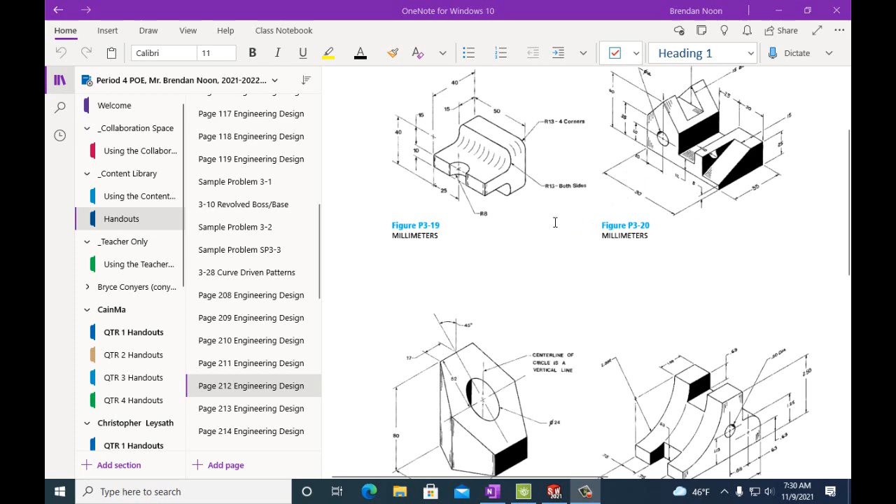So I'm gonna do 319, 320, and 321, so you can see how to do those, and then you could do 322 on your own. I'm pretty sure you can complete this one on your own already. Pretty sure you can complete this one too, but it has a lot of steps here, and there's a lot of different ways you can do this. But I'm going to show you how I'm going to do it. And then you could follow along, or you can follow your own methods, or try it on your own first.

So let's go ahead. We'll do 319, and what do we have? We have millimeters. This is 10. This is 15. 15 across, and we have 50. And let's see, what is the height over here? Let's look at this. This is 40. So we have a total height of 40. So we have 15 by 50 by 40 for this, and then I'm going to draw on this face.

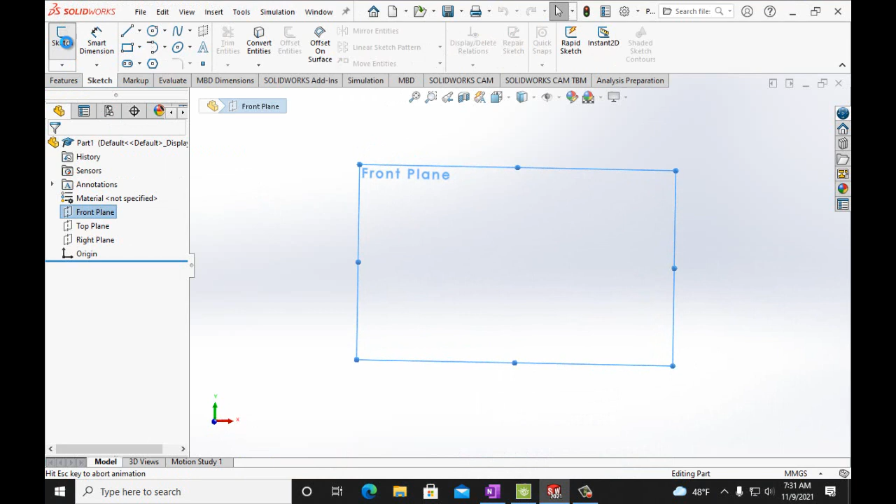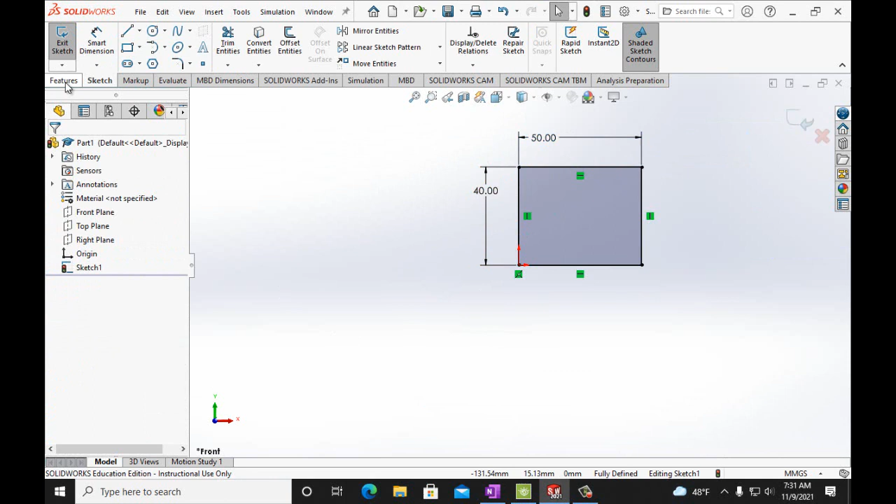So I'm going to start on the front plane. I'm going to draw a rectangle, and then I'm going to draw another rectangle and extrude that out. All right, so we want 40 by 50. Front plane, sketch, rectangle. Smart dimension it. 40 millimeters by 50 millimeters. And we're going to extrude that out 15 millimeters. Check mark. All right, so we have this shape.

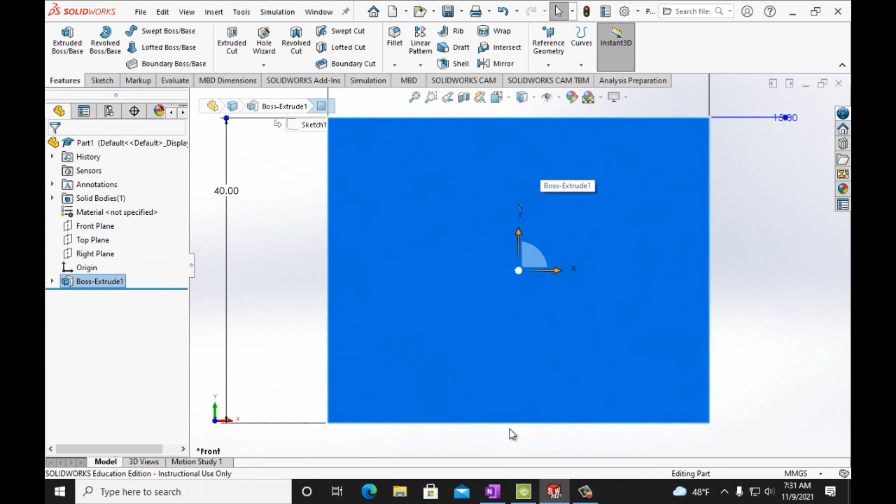So let's look at this face right here. Let's go to front, and what I want to do now is I want to draw this. This is 10, and let's see, that's 40. 15 plus 15, so it's centered 15 above and 15 below, but really all we need is a distance of 15. So this is 10, and then it's a distance 15 from the top.

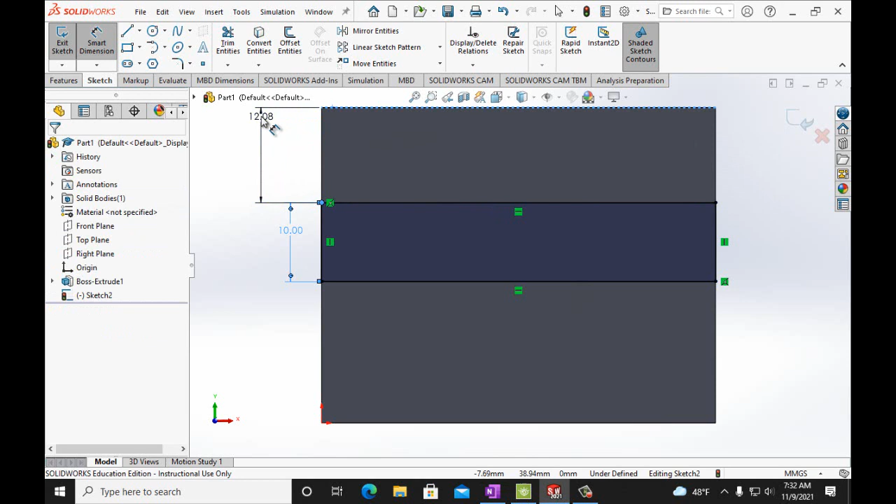So we go ahead and get our sketch, rectangle tool, draw a rectangle, smart dimension, we want this to be 10 millimeters. And we want the distance from here to here to be 15 millimeters. All right, so that's centered. And then let's go back, and this is 40. So 40 minus 15 is 25. So we're going to extrude this out 25.

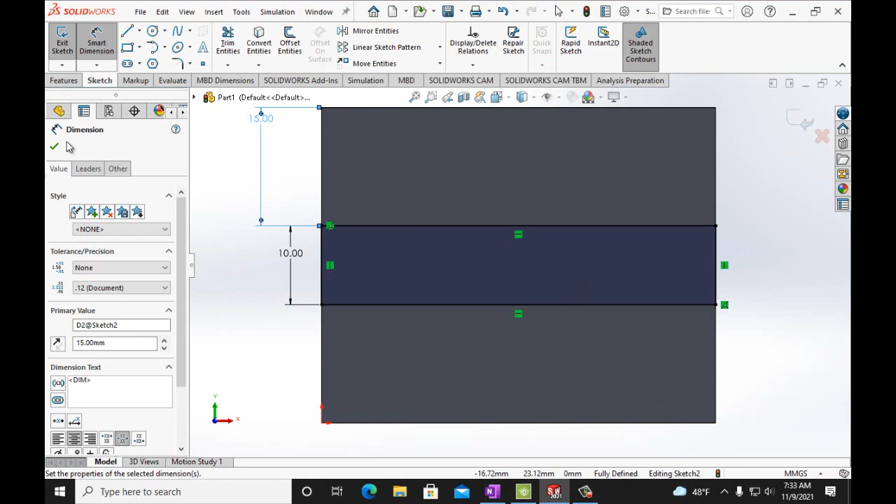Features, extrude boss base. Let's look at the angle here. Want this to be 25 millimeters. All right, so here we go. So we have this shape. Now what we want is a radius of 13, a fillet on both sides here, and radius of 13 all the way around. So we're going to fillet all these corners.

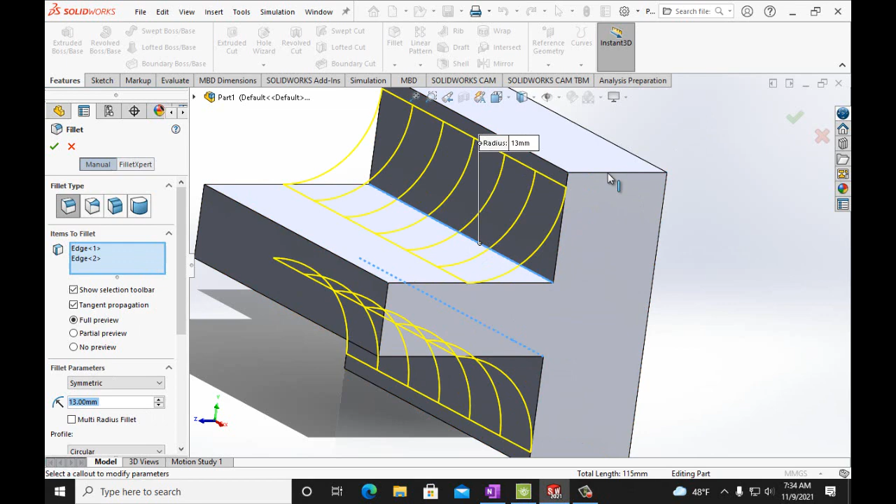All right, so we have our fillet tool. We want it to be 13 millimeters. We want a full preview. We're going to click here. We're going to click on that line down there. We're going to click here. Oh, let's do this first. Let's see. All right, oh, radius of 13. Yeah, radius of 13, 4 corners.

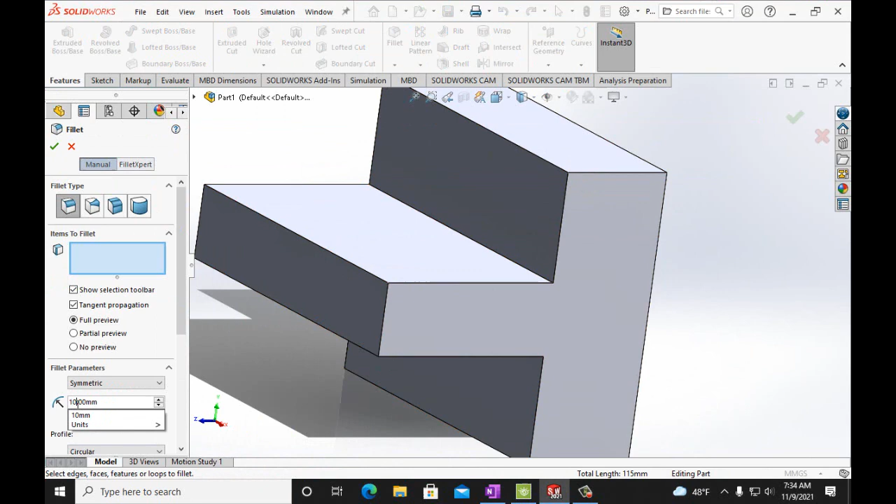All right, fillet tool. Radius of 13 millimeters. Full preview. 1. All right. Zoom out. Over there. Over there. Over there.

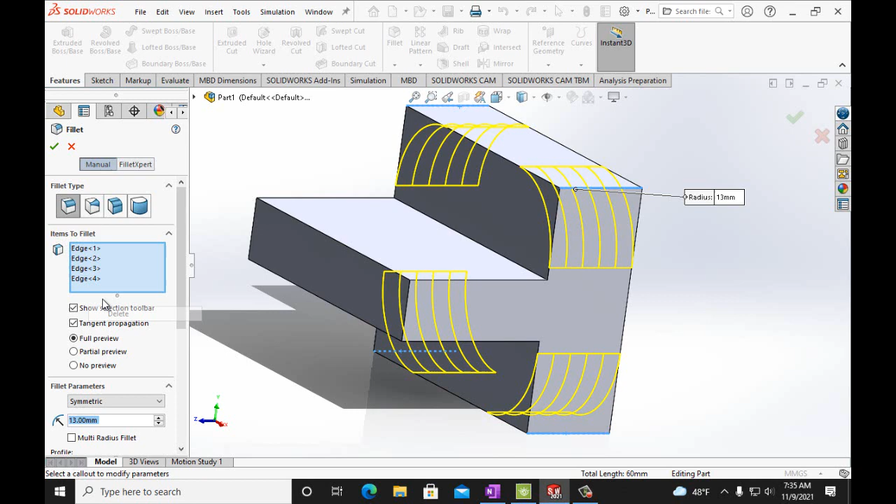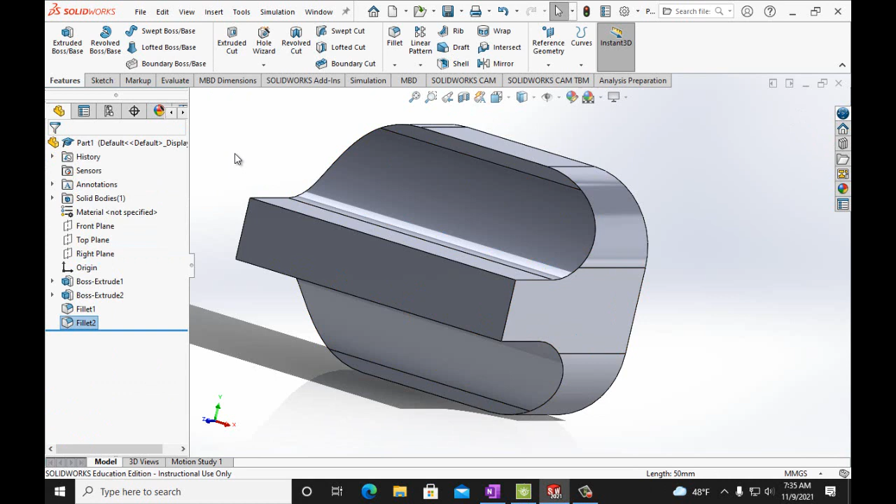All right, good, okay. All right, so we have this shape. And now we want to do radius here. Fillet. Here. And here. All right. So there we have this.

So the last thing we have to do is, on this face, let's see what we got here. We have a radius of 8, 25. So right in the center here, we have a radius of 8. So what I'm going to do is I'm going to do a circle, and I'm just going to do a cut through all. All right.

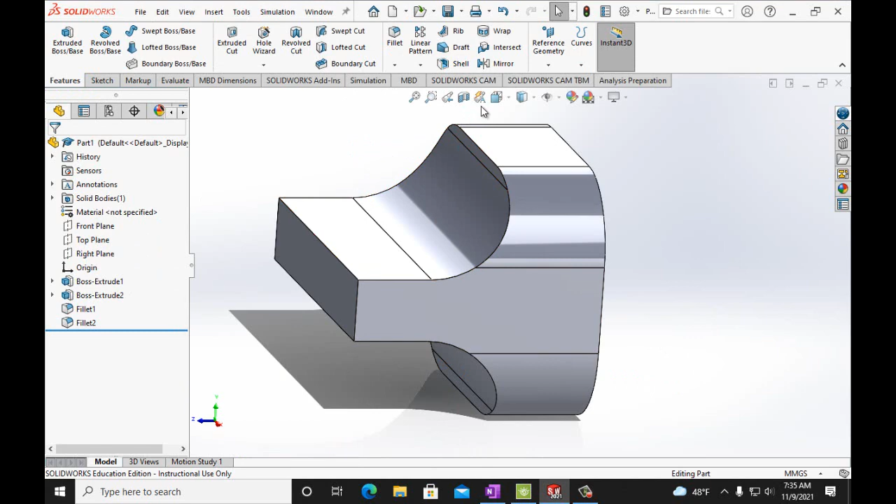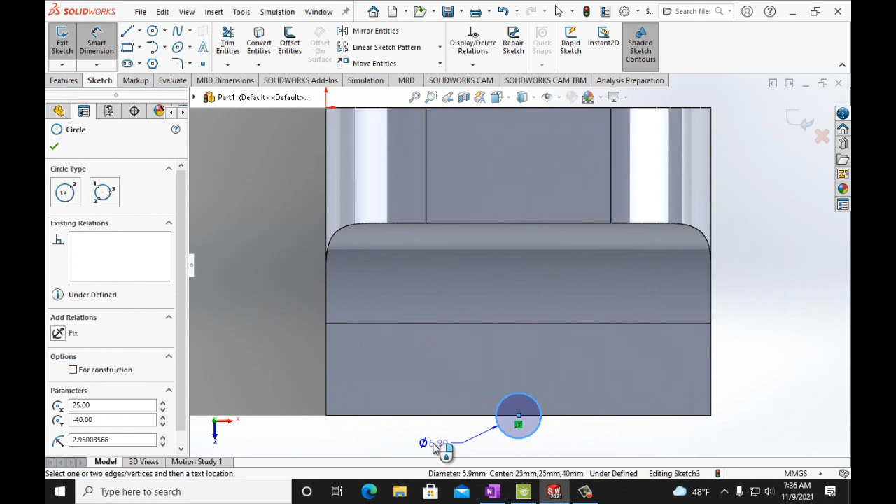So let's go ahead, come back here. I want to look at the top plane, I think. That's not top plane. Top plane. I'm going to click here. I'm going to sketch, circle, and then I want to come here and I want to find the middle part right there. I'm going to draw my circle. Smart dimension. And we have a diameter of 8 millimeters.

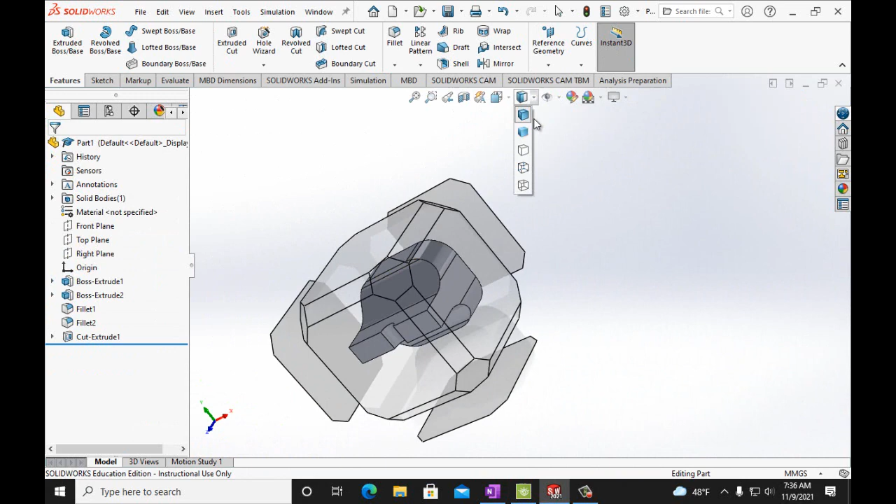And then I'm going to do features, extrude cut, through all, check mark. All right, so this is, oh, this is a radius of 8. I'm sorry, I did a diameter of 8. All right, let's go back. Edit, undo. Click on this. I want a diameter of 16 millimeters.

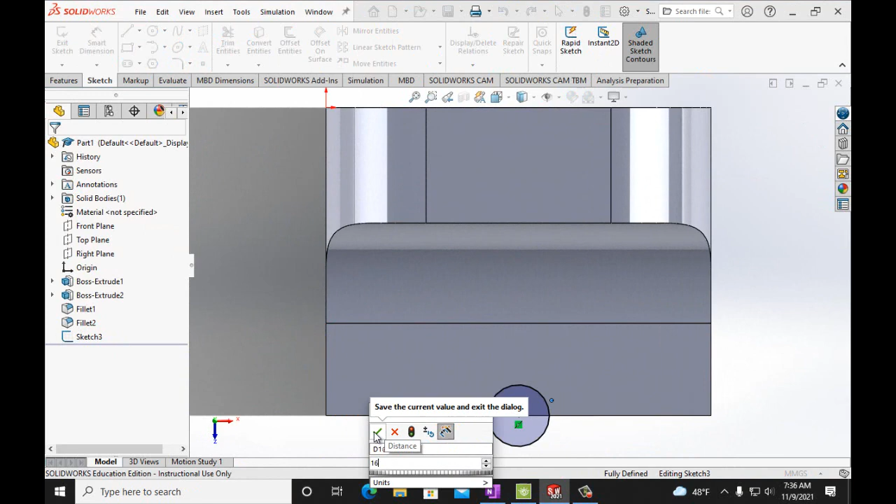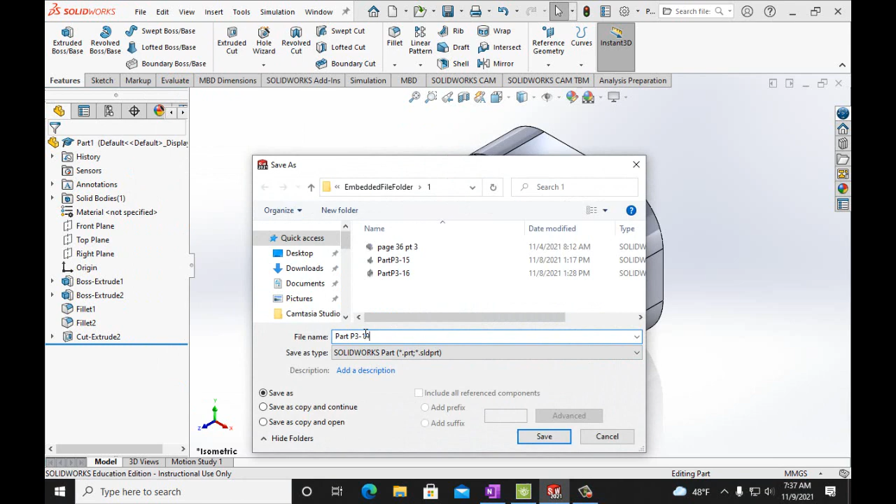Now I'm going to do the same thing. Feature, extrude cut, through all. All right, and I'm going to come over here. I want to do an isometric view. All right, so there you go. So this is P3-19. Of course, you need to file, save as, part P3-19, save, file, make drawing from part, okay.

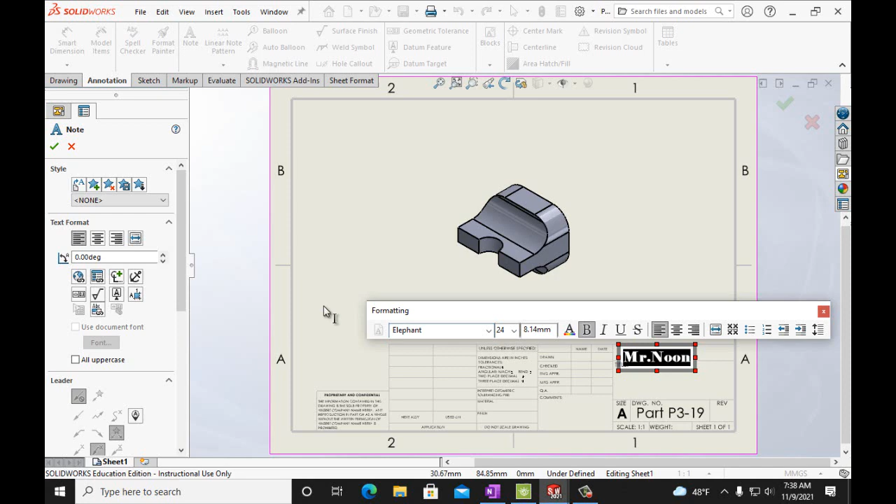All right, by now you should know all the different ways you can make drawings. We're going to put a note here, our name. We can increase the font, change the font, all that stuff. Make it bold. Okay, file, save. Yes. File, print. OneNote for Windows 10. Okay.

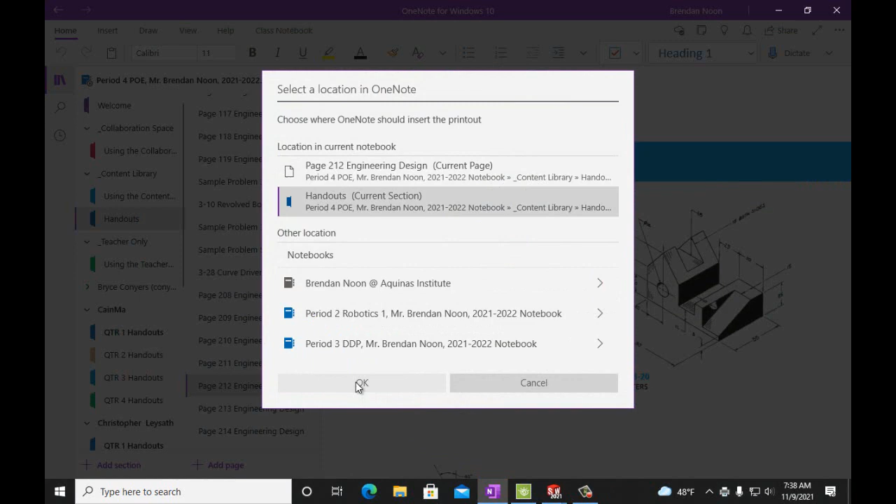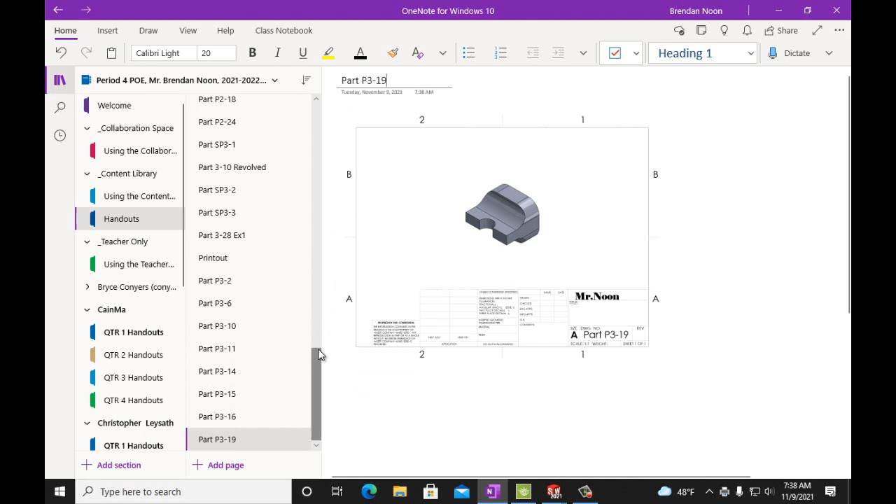And then pick where we want to put it. Set OK. We have the part P3-19. Okay, so that's all set. So we go back to our drawings.

Now, I'm going to do this one first because this one's easier, P3-21, and then we'll do this one, which is a little more difficult. All right. So let's get rid of that. Save all. And then we're going to do File, New, Part, OK. We're going to start on the top plane, sketch, and we want a Polygon Tool.

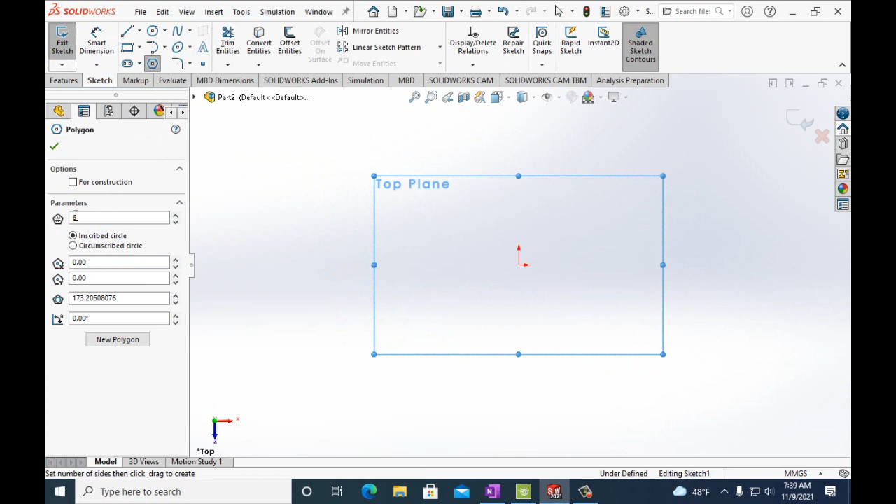All right, hexagon, 6 sides. You start in the middle, you drag yourself out. You can make the shape any way you want. Put it like this. Now we really don't have to do much, but I'm going to add a relation right here. I don't care about any of these. I just want this one to be horizontal. So it's perfectly horizontal. Everything else will be right into shape.

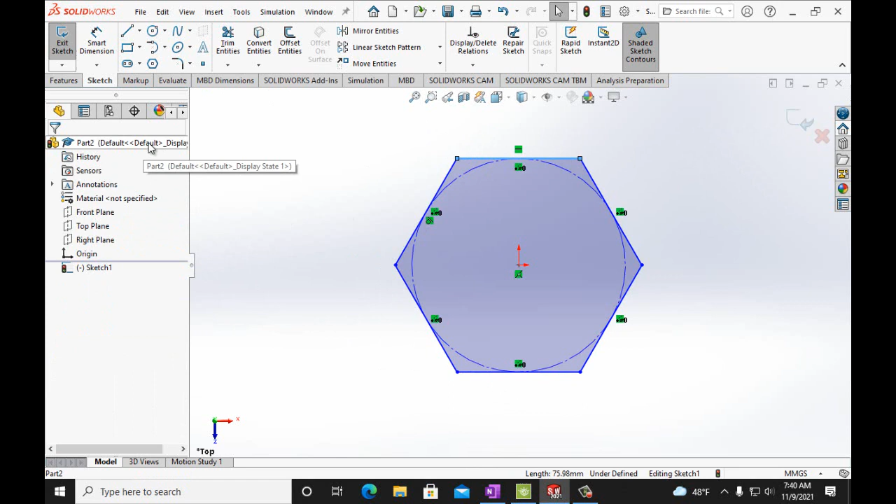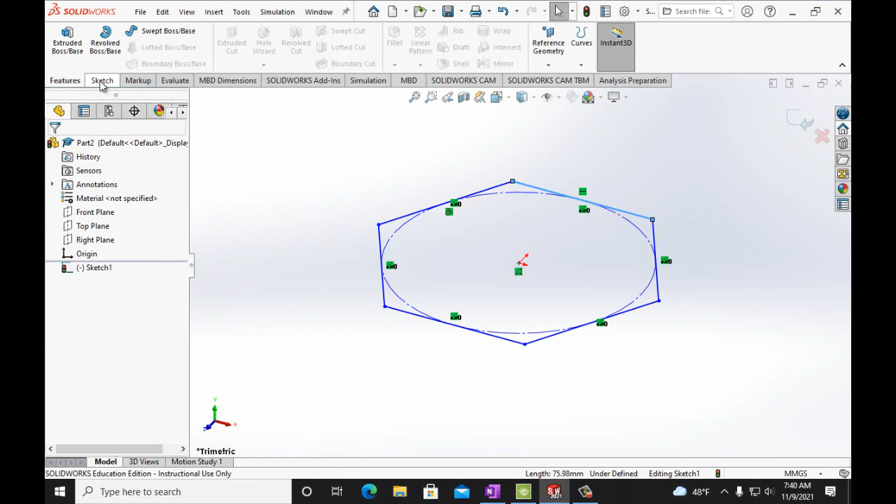All right, so features, extrude boss base. Let's see, how large do we want this guy? 80 millimeters. Oh, and the sides are 17 millimeters. I didn't do that yet. So let's go back here. All right, forgot to do that. Sketch. One side equals 17 millimeters. And then extrude boss base, 80 millimeters.

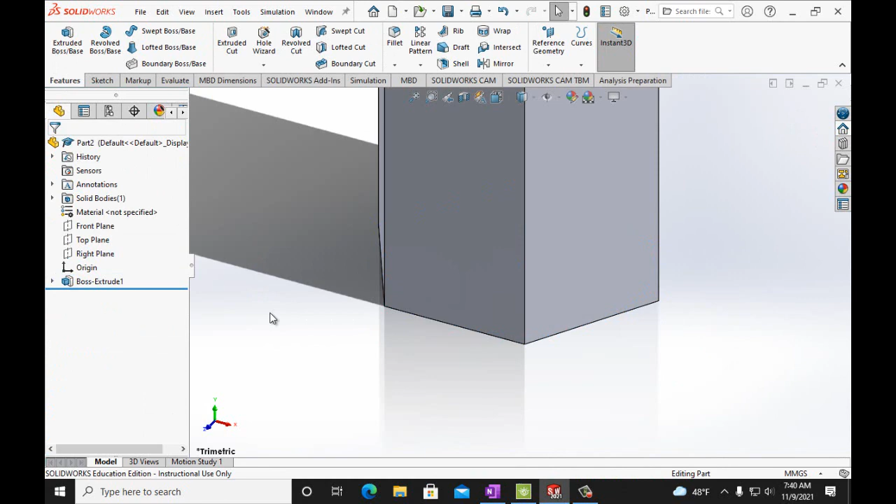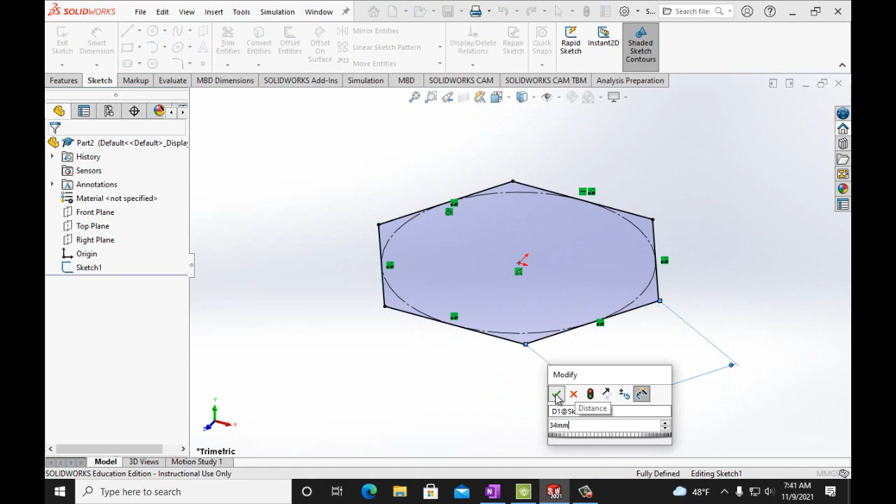All right, so we got this guy. Is that right? 80? Oh, wait, no. It's double 17. Oh, why did they do this? All right, so 17 plus 17 is 34. Okay, now I got to go back and do this over. Edit, undo. All right, so this would be 34 millimeters. And then features, extrude boss base, 80 is still there. All right, that looks more reasonable.

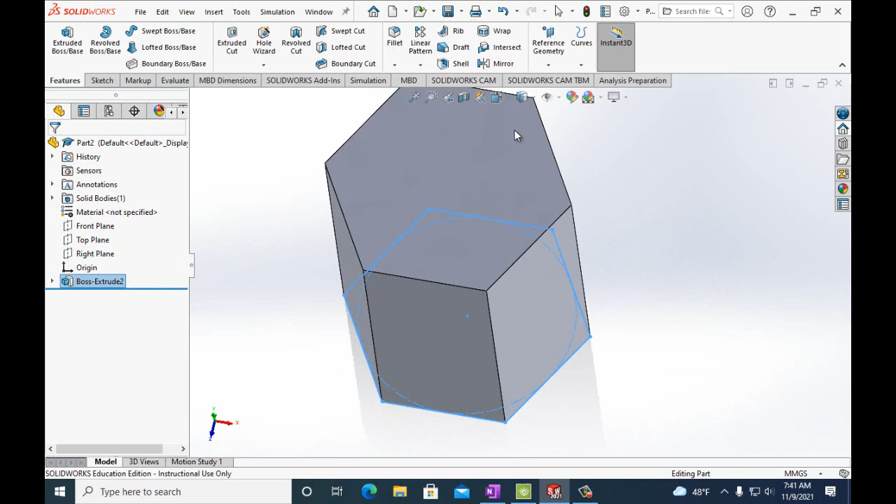All right, so we want to do top plane. So let's look at the top. Click on this face, sketch, circle. All right, and we want our circle to be a diameter of 24 millimeters.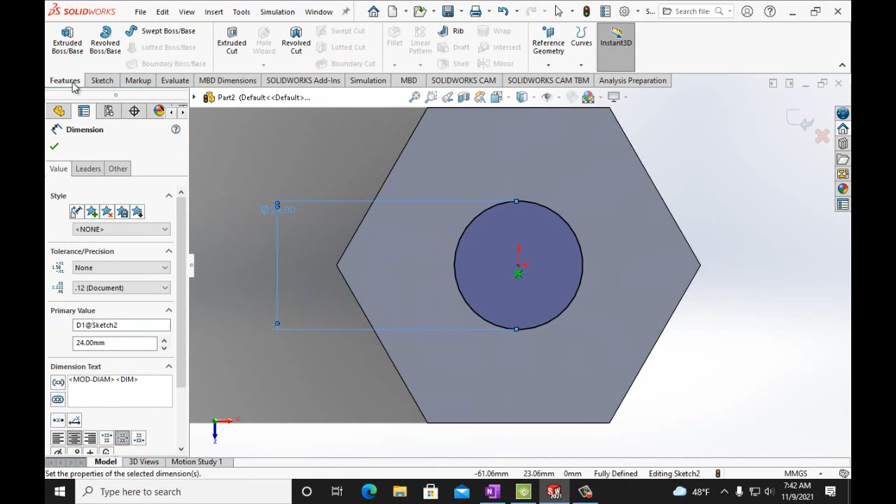And then we're going to extrude cut through all. All right, so we have that in there. Alrighty, so let's see, how do we do this? This slice is at an angle, so let's look at our sides.

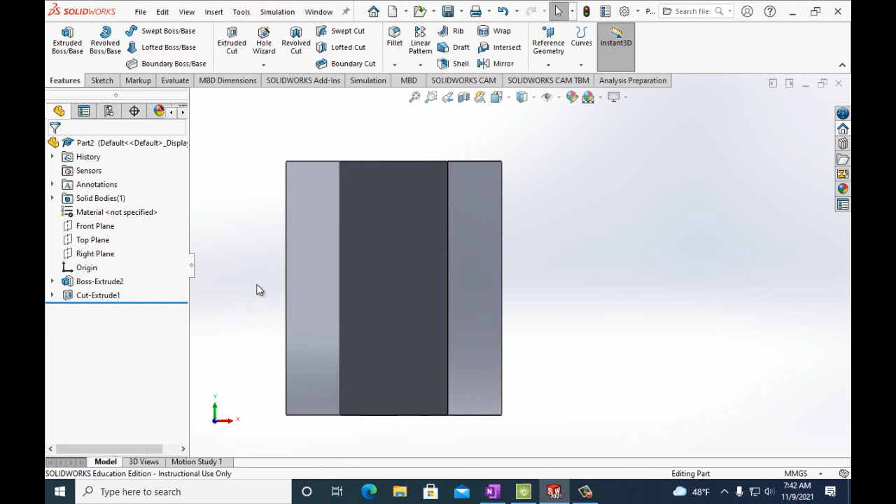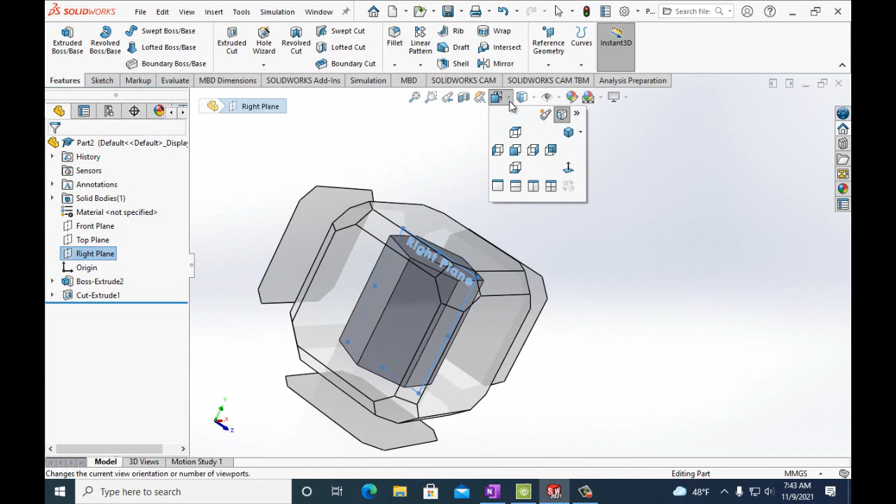Right plane, front plane, right plane. Okay, right plane. So then we go on the right plane here so we can look at it correctly. All right, this is good. All right, so we're on a right plane and we're going to do sketch.

And this is really simple. We want this to be, we got here, 45-degree angle, and it just goes across from the top over to here at a 45-degree angle. That's it. So let's come over here. I'll get our line tool, take this point, and come here, and then go up to here, and then over to here.

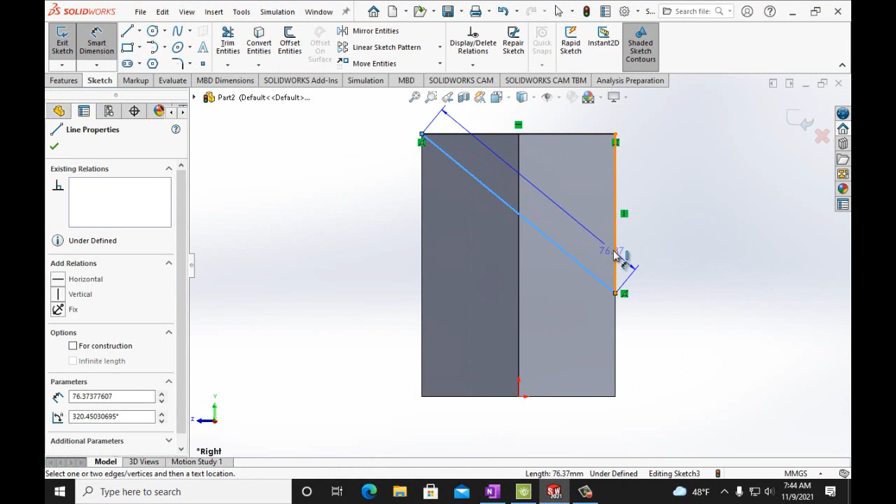And I want to see if I get this right with the angle. I don't like it when they turn it sideways like this. I wish I could rotate this to look at this angle. It messes with my head, spatial dimensional. All right, so 45 degrees between here and there is the same as smart dimension from here to there being 45 degrees.

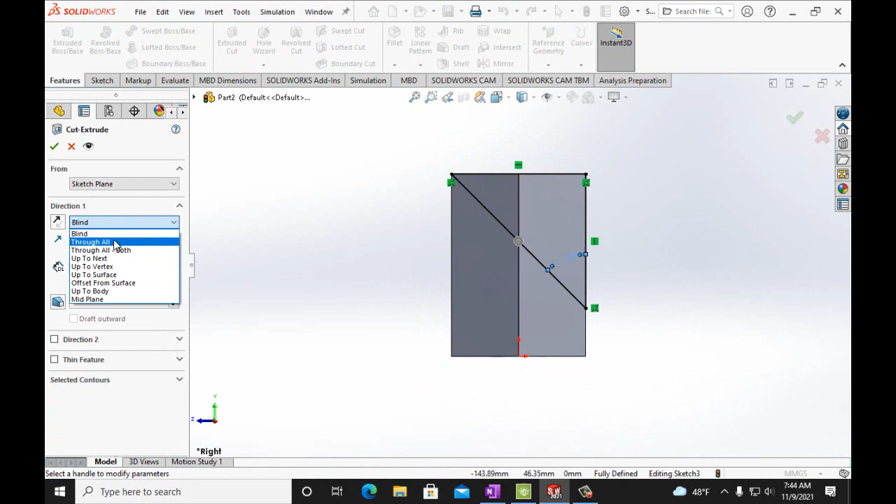45 degrees. Okay. So now all we got to do is features, extrude cut, through all, both ways. Hit OK. And let's see, is that what it looks like? Yep, that's it right there. So let's look at this. That's a good view right there. All right, this is part 3-21.

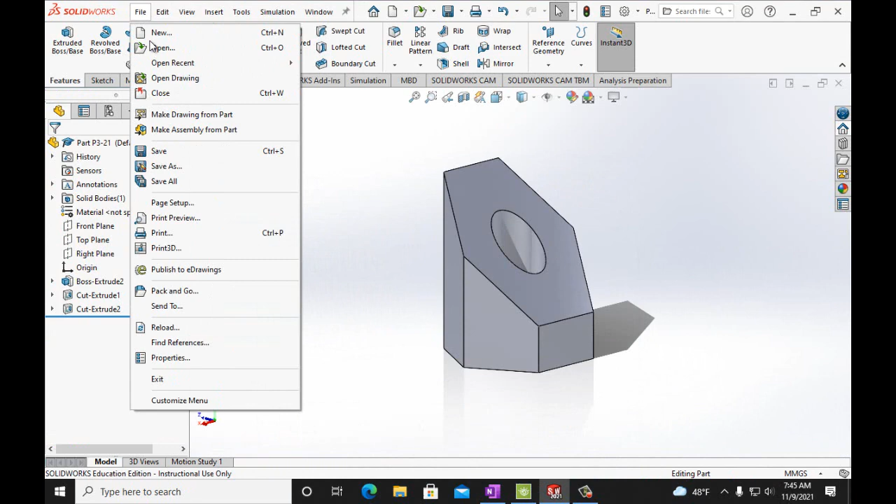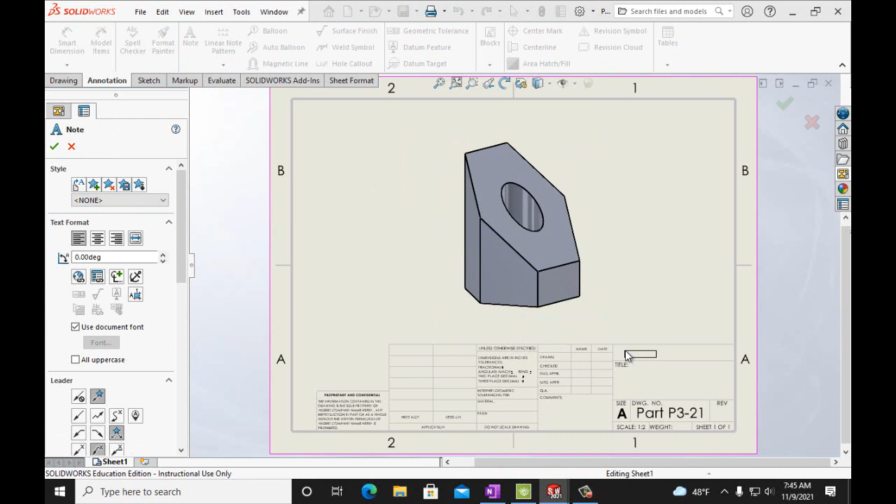File, save as, part P3-21. Save. File, make drawing from part. Okay. Click there. All right, let's take this. I like it to be larger. That's good. Move it over right to center. Put down a note here. Font 26. Font, who cares? Put your name.

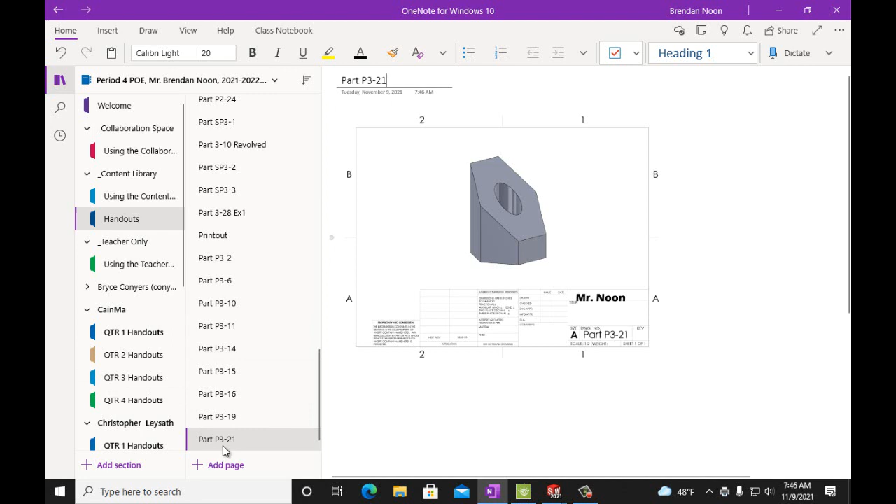And then go ahead, file, save. Save. File, print. OneNote for Windows 10. Hit OK. Yes, in our handout section. And there you go. This is part P3-21. There you go. It has a name there. That's all submitted. All right, so we got those two.

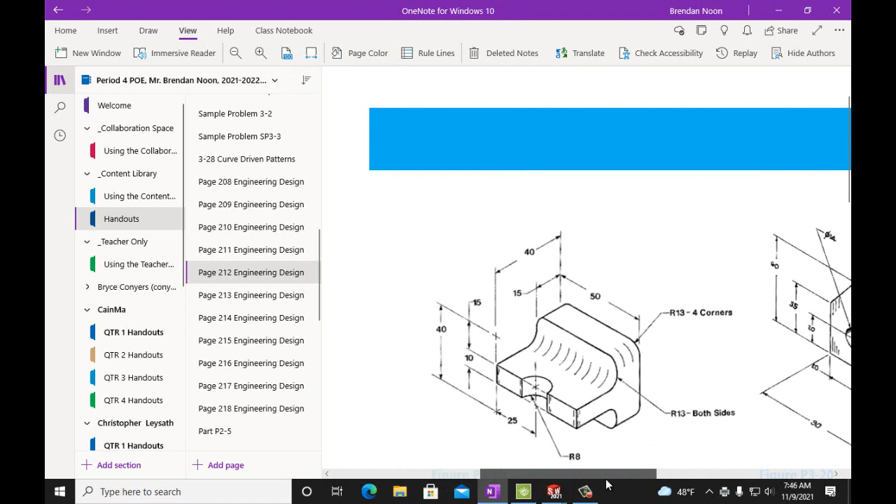Now we're going to do figure P3-20. Now for this, I'm going to view. I'm going to zoom in. Zoom in again. Move this over here. Oops, not too far. This is in millimeters. That looks good like that. Come over here. I don't need this stuff anymore. File, new, part, OK. All right, let's take a look at what we got here.

All right, so where do I want to start? I think I'm going to draw this profile, and then I'm going to extrude this off this face. Oh, what is this? I can't even read that. 90? I think that says 90. Let's see. This is 20. This is kind of sloppy. Maybe that's 80, 90. This is 55. 55 by 25. So it's 50, extruded 55.

This is 15. This is 30. This is 10. All right. This is 20. Oh, here we go. This is 30. This is 25. Assume this is symmetrical. 20 and 20 is 40. Oh, this is 90. Yeah, okay, 90. So I'm gonna draw this crazy shape here. Let's do 90 all the way across. 90 by, all right, so let's just do it.

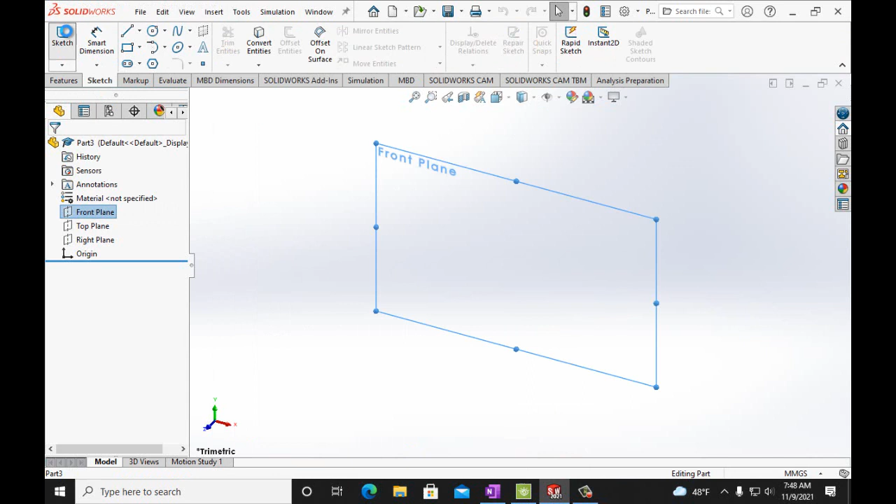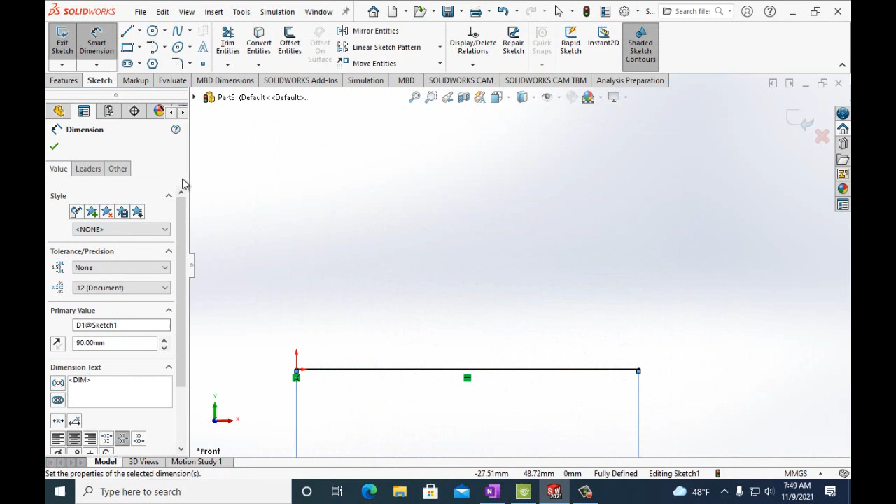All right, so front plane, sketch, line. I'm gonna start here. I'm gonna draw across. I'm gonna smart dimension this so that it's 90 millimeters. All right, I'm gonna do this more like here. All right, so now this is 35, so let's do that. Smart dimension, 35 millimeters.

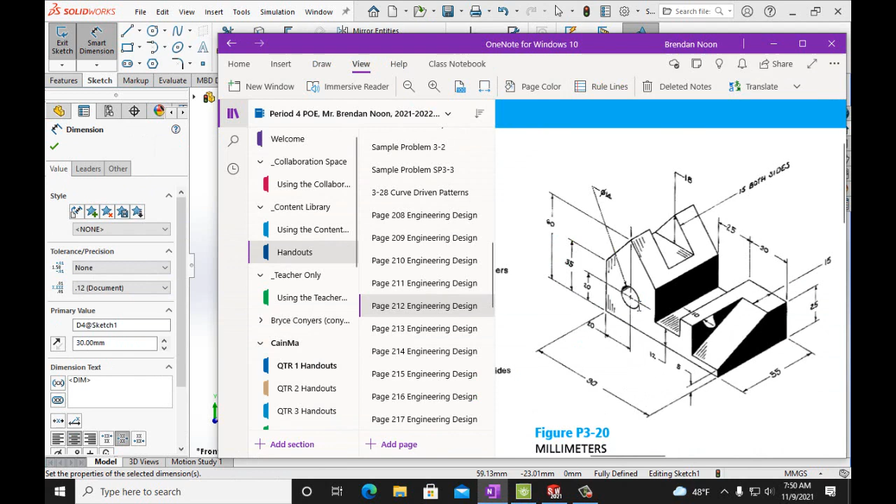I don't know. I think that's 60. I can't even tell. Let's come over this way. This is 25. 25 by 30. 25 millimeters. 30 millimeters. I think this says that's 20. I think it says that's 12. Let me see if I zoom in closer. Yeah, I think this is 12 here.

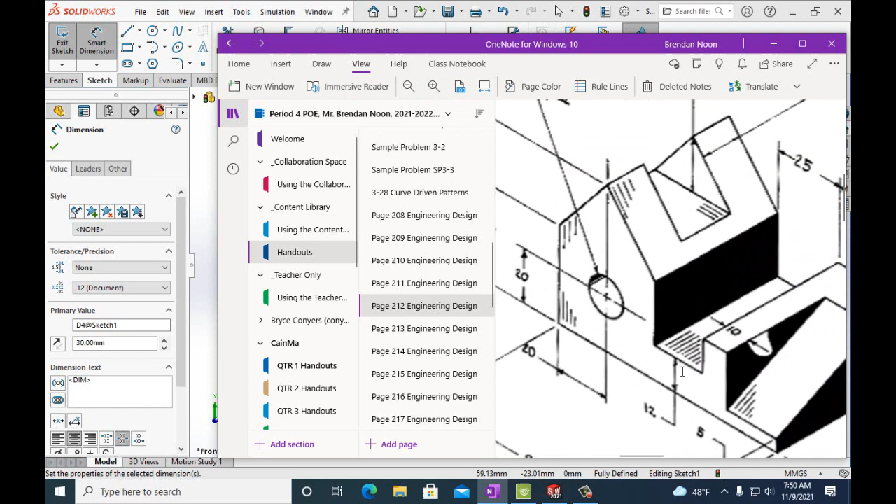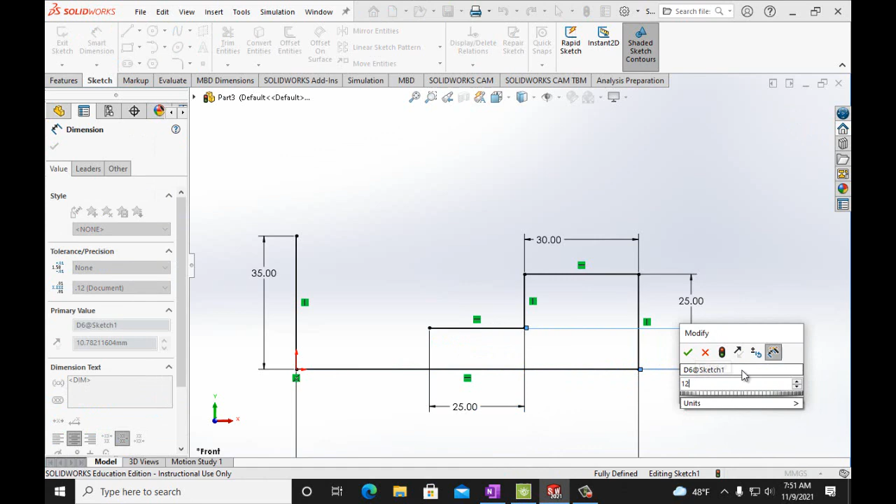This is 25 across. So we're gonna do this. This down. This over. All right, so smart dimension. This is 25. And then the distance between here and here is 12 millimeters. Yeah, it looks right. And then it just goes up to this height.

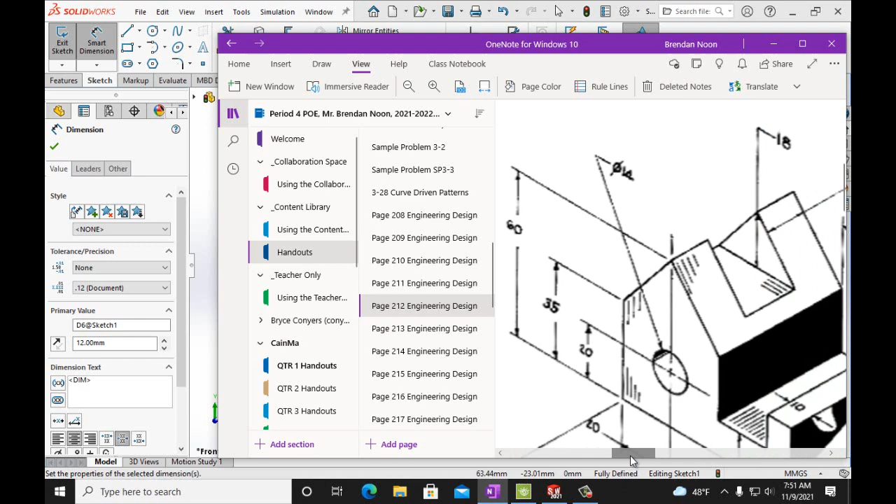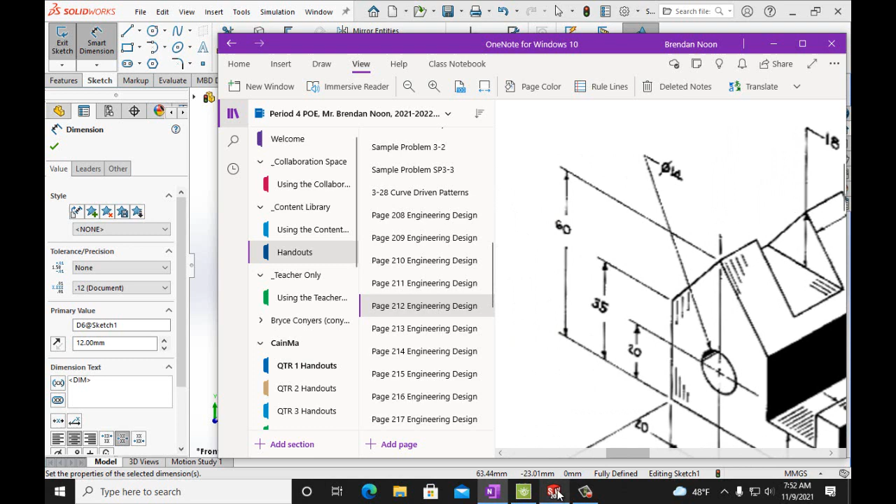This distance here is 15. That's not really relative yet. All right. So this is just symmetrical. That's 60. Okay. Got a line here. All right. Wanted that to be the same height as that one. What else do we have here?

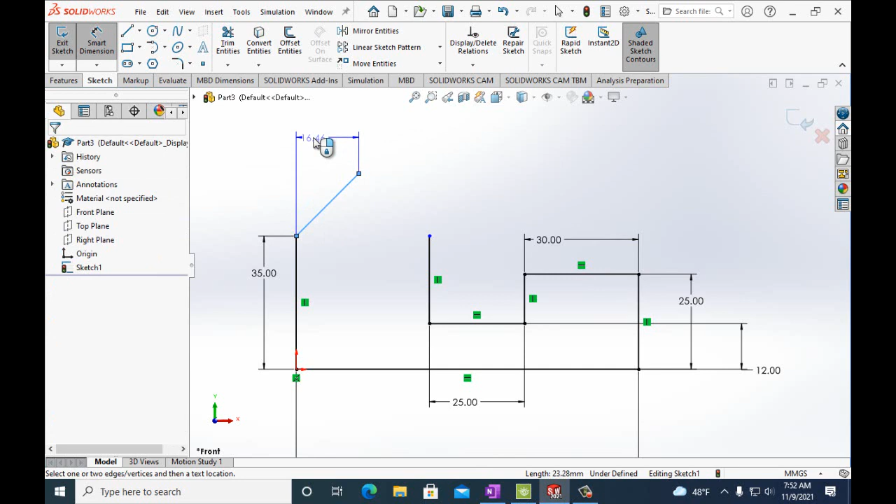20. The distance to the top is 20. So we have a line from here to there. And so we want smart dimension. We want this to be 20 mm this way, and from here to here to be 60 mm. All right, doesn't quite look symmetrical.

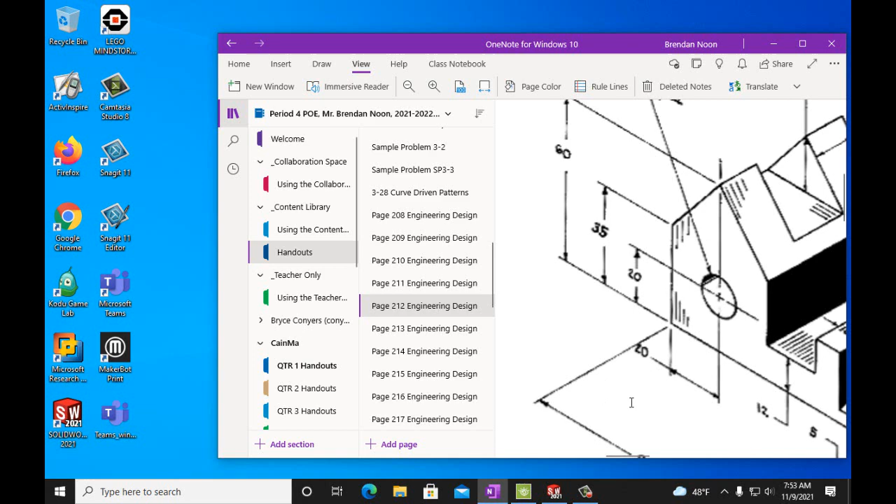This is 20. From here to here is 20. And from bottom to top is 60. All right, so let's draw this. So this should go like this. All right, doesn't look quite symmetrical, but let's take a look before we do this.

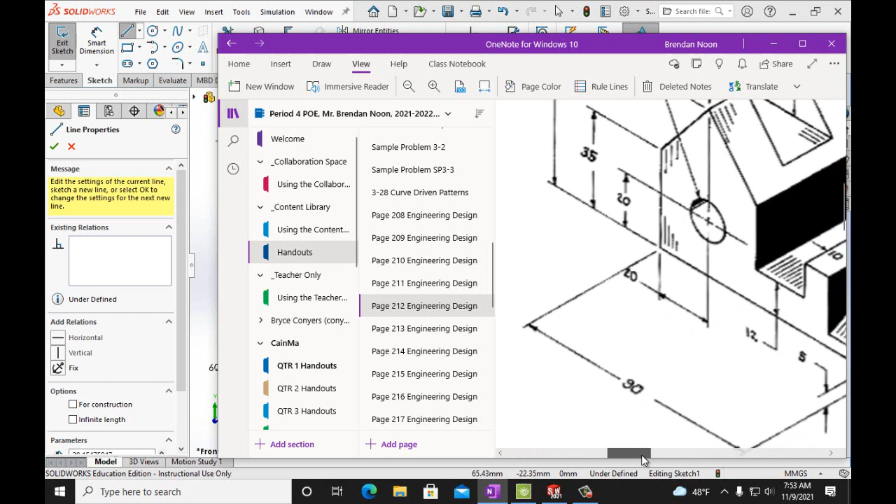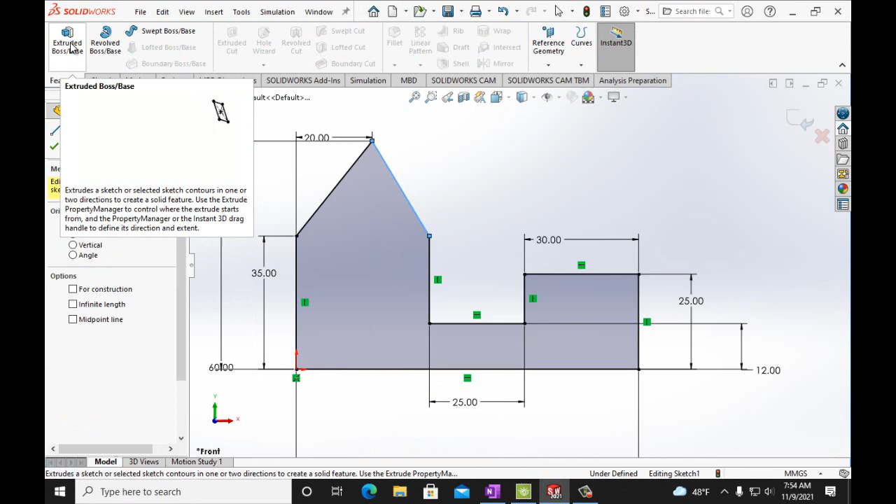Okay, so we got 35, 60, yes. That's 90 across. 30 and 25. And that one's 20, so that's whatever's left over. All right, so that's that. And this will be extruded 55. All right, so let's just take that, extrude 55 millimeters. All right, so that looks about right.

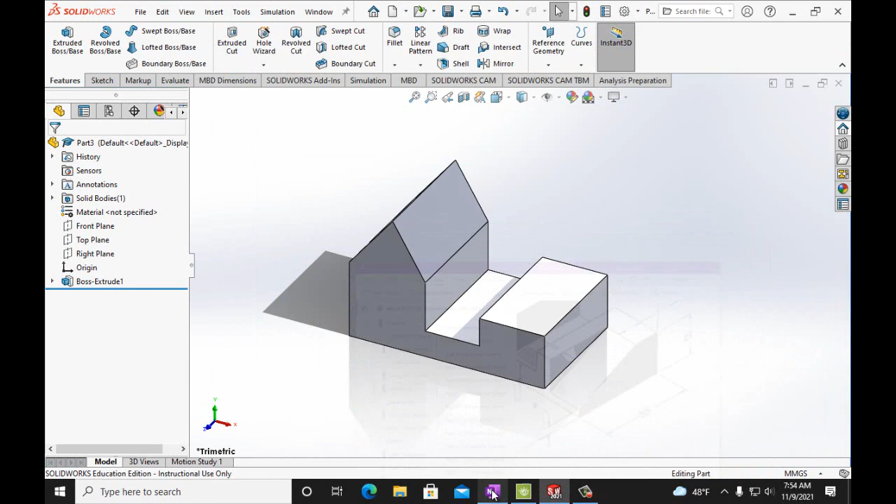All right, so what do we got going on here? We got a circle, I know that. We got this cut here, 55 by 20. That's 15. This is 5, so we have a height of 5 and we have a height of 15. And then if this is 10, then we cut 20 into it. So let's go ahead and do that.

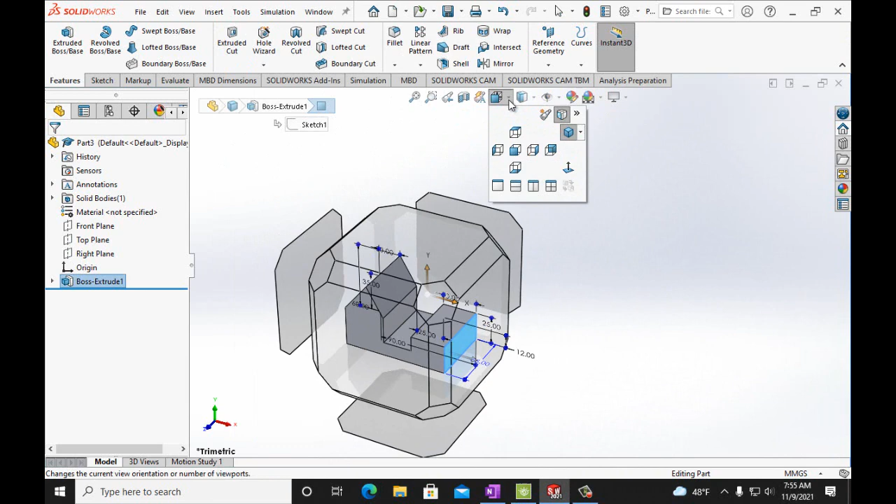So we click on this face and we go to our plane here and we draw a sketch. We do a line from here to there, and then we draw here, and then we draw here, and then we want a smart dimension from this to be 15 millimeters. We want this to be 5 millimeters.

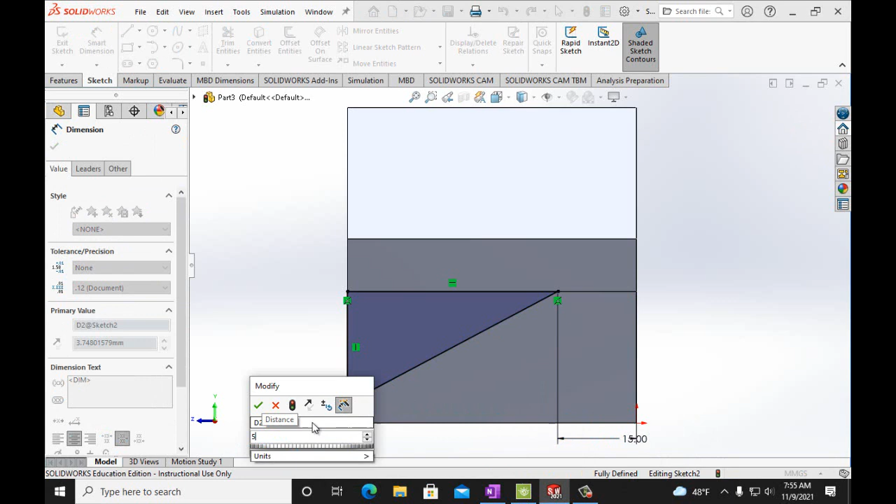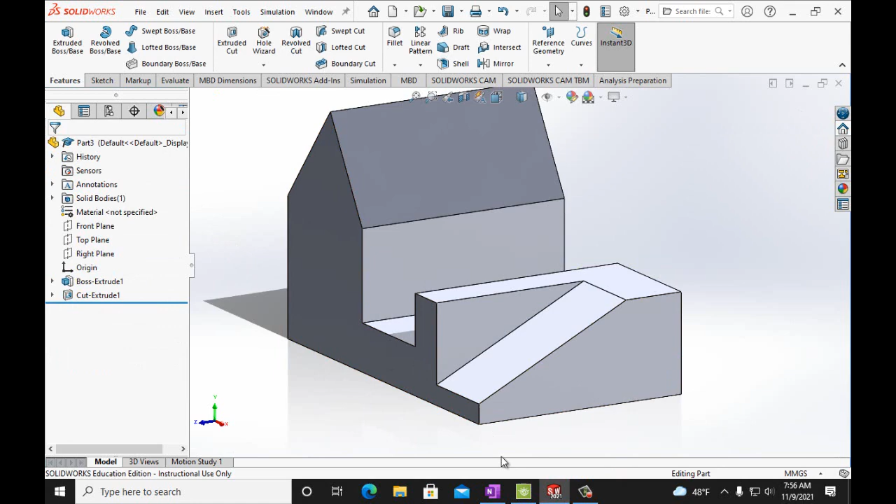Okay, and then we want a feature extrude cut. All right, let's take a look at that. We want that to be 20 millimeters. We hit the check mark. All right, so we got that shape right there. So that's taken care of. Now we'll do this circle right here. The circle has a diameter of 14 millimeters, and it's over 20 and 20.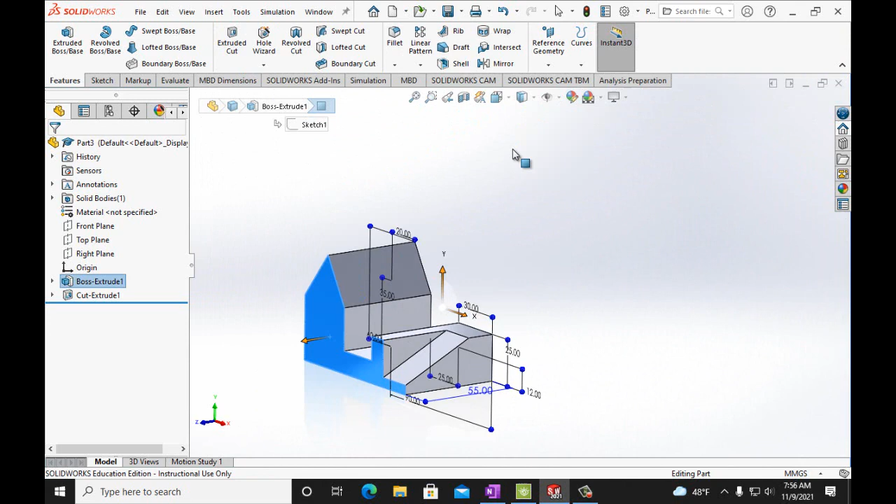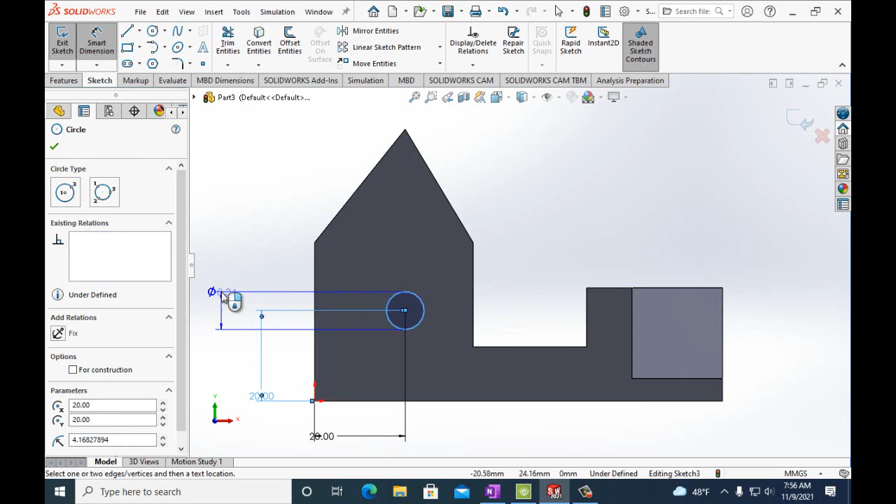So click on this face and go to our front plane and sketch, circle, just draw a circle anywhere, smart dimension, we want it to be 20 mm and 20 mm, and we want the diameter to be 14 millimeters. Now we're going to do a features extrude cut through all. All right, so we have that.

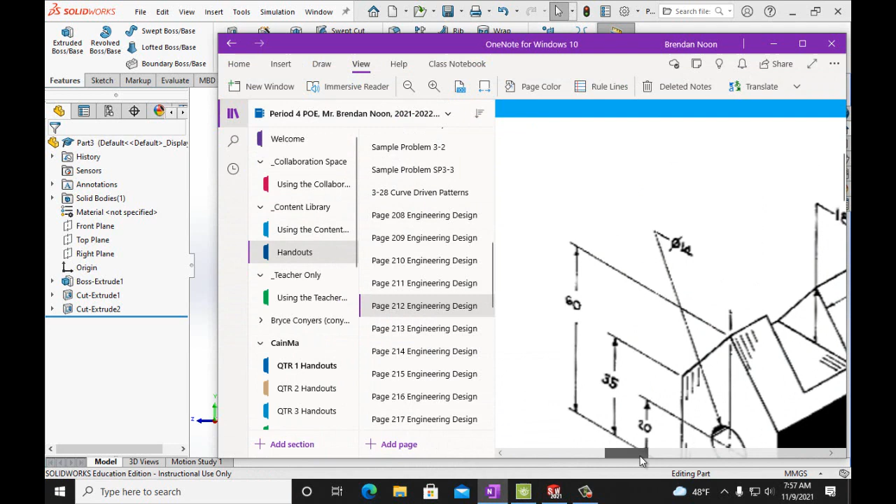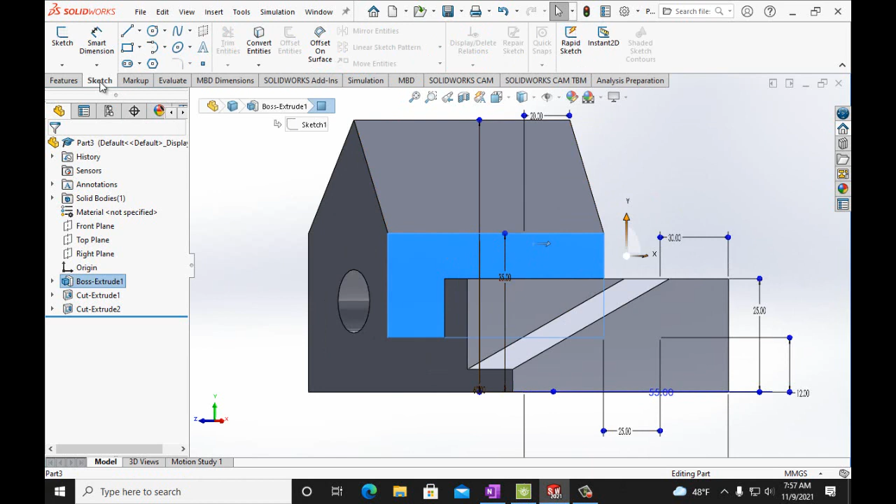Now the last thing we're going to do is on this. We're cutting out a rectangle here, and it's over 15 and it's a height of 18. So we just got a rectangle. So this is pretty easy with this figure. I'm going to click on this face. I can click on any of these faces. Click on this one. See, that's this face right here. File, sketch, and then I'm going to do a rectangle.

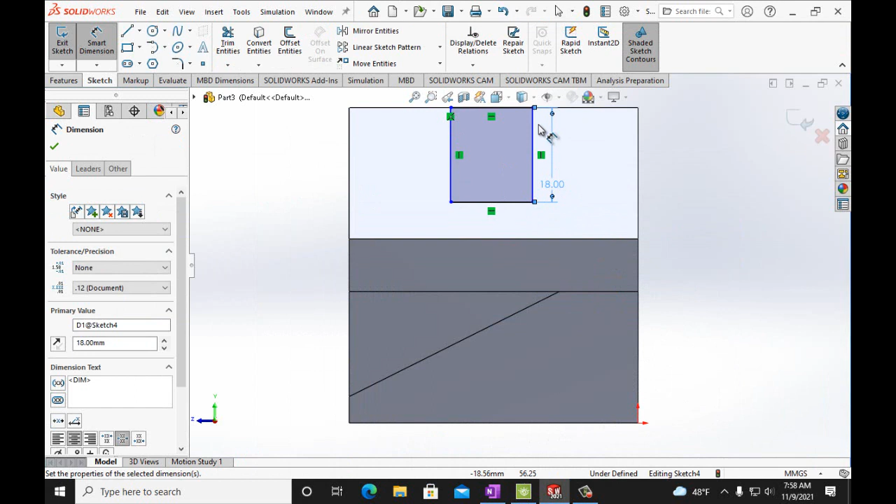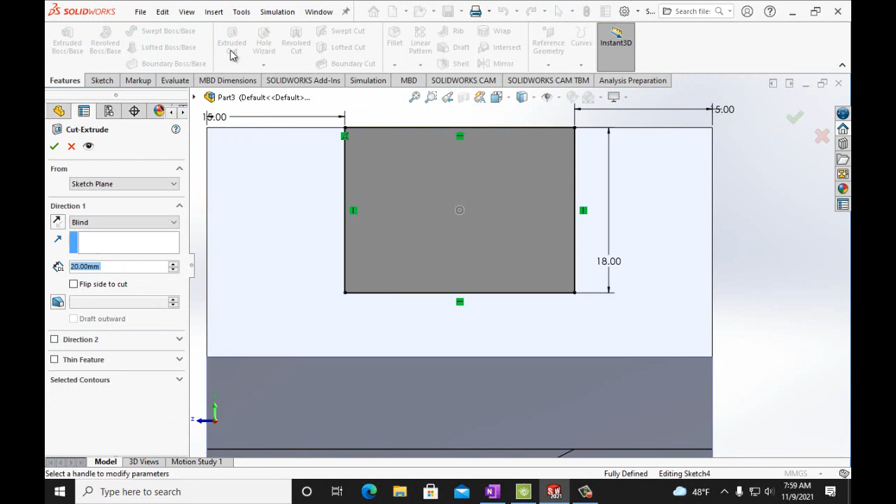Just going to come over here, draw a rectangle, and I'm going to smart dimension this. So this is 18 up and down, 18 millimeters, and then from this side, click to here, that's 15 millimeters, and then click here to there, that's 15 millimeters. Features, extrude cut, through all, click on it, and there you go.

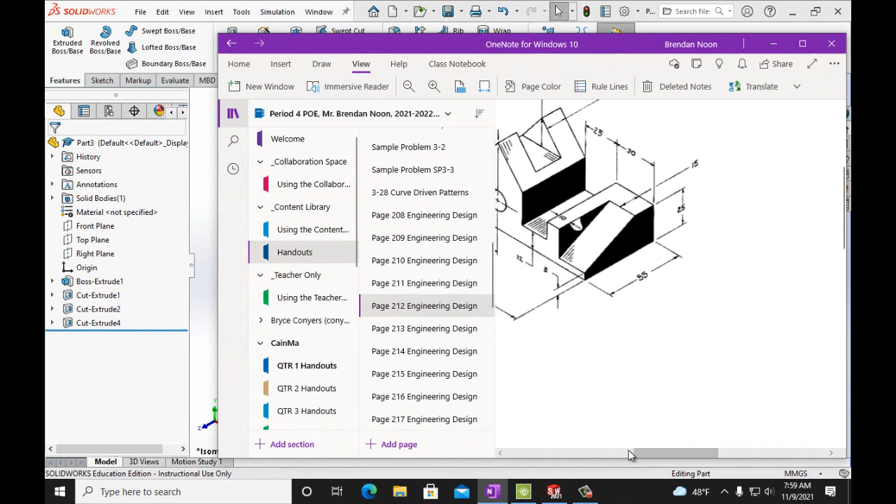All right, let's do an isometric view. There you go. So let's look. And that is all set. So there you go. Now you just go ahead and do this one, P322, on your own. You have to do all 4 of these and submit them. I'll go through and finish this one.

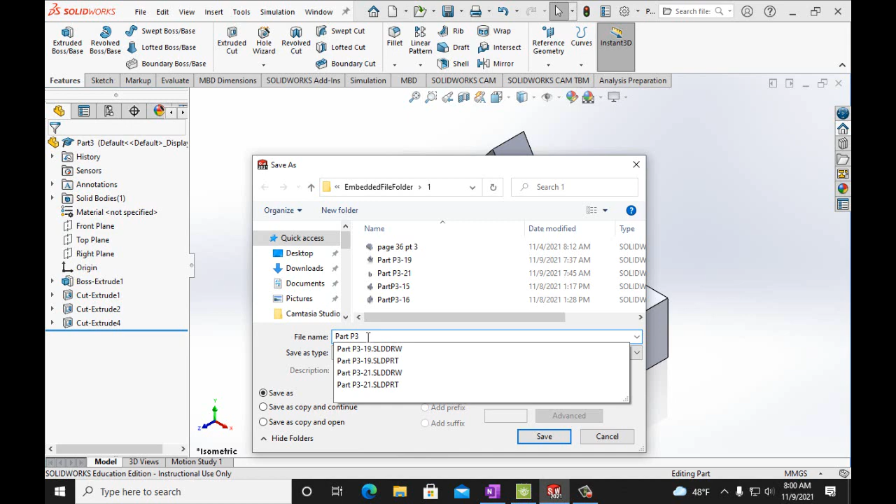This is P3-20. All right, so let's go ahead and file save this. File save as part P3-20. Save. And let's make a drawing from the part. Yes. Hit OK.

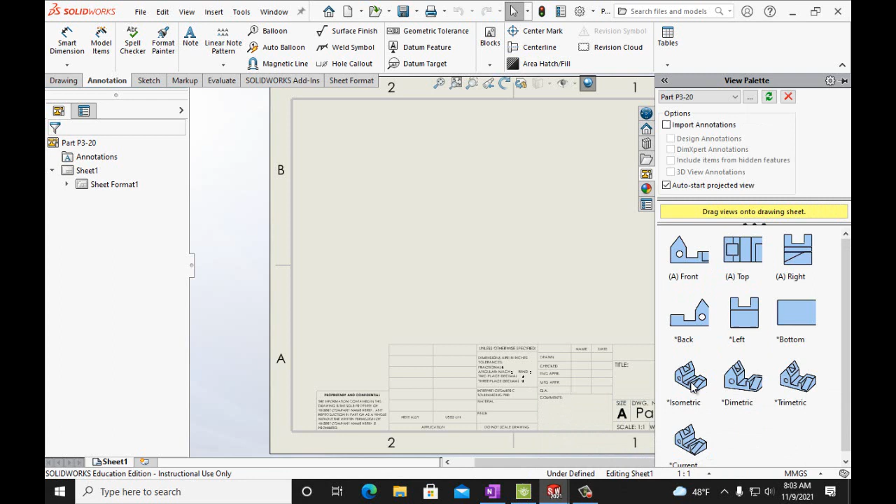So we get to pick one of these. This trimetric view. No, I like the isometric view. Let's do isometric view. Pretty good size. I like that. A note. Pick your font. Font size. Font type. Put your name on it. File save.

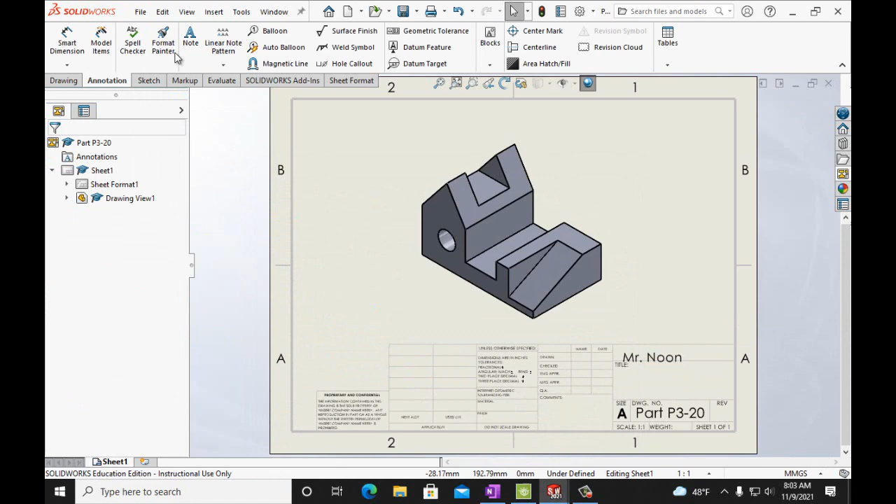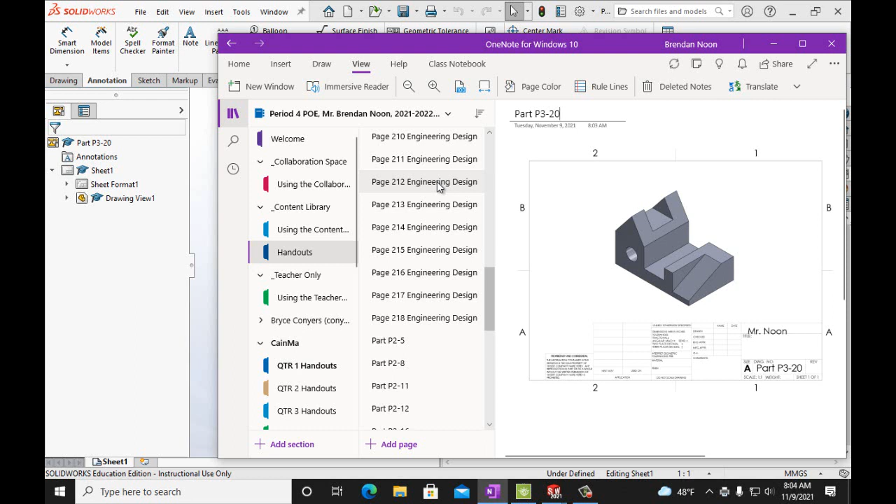File print. OneNote for Windows 10. Okay. Put it in your notes. All right. Part P3-20. That's submitted. And there you go. So you need to submit all 4 of these. I'm going to leave this last one for you to do on your own. After doing these 3, you should have no problems with this one. So good luck.